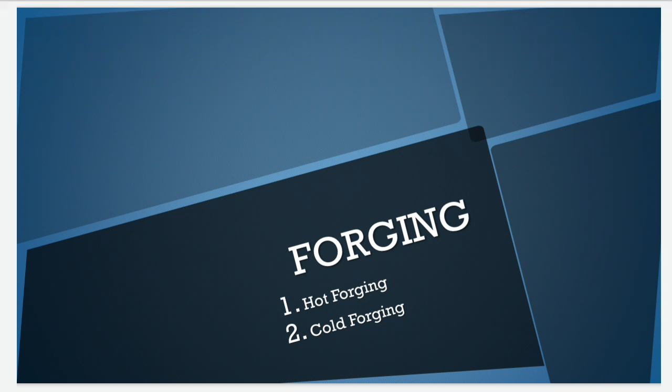This is continuation of module 4, forging. Forging is a compressive metal forming process involving shaping a metal piece by hammer or press. The figure shows an open die forging process. Note the red hot bar stock in place.

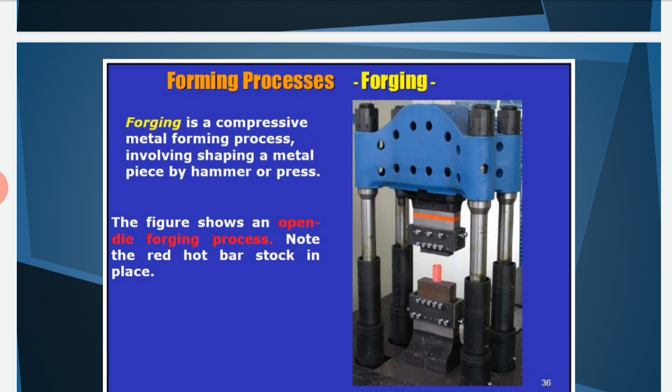Classification of forging operations: cold versus hot forging. Hot or warm forging, most common due to the significant deformation and the need to reduce strength and increase ductility of work metal. Cold forging, advantage: increased strength that results from strain hardening.

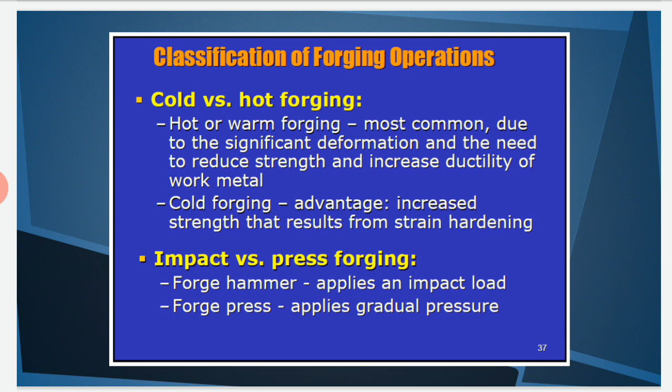Impact versus press forging. Forge hammer applies an impact load. Forge press applies gradual pressure. Types of forging dies: first one open die, second one impression die, third one flashless.

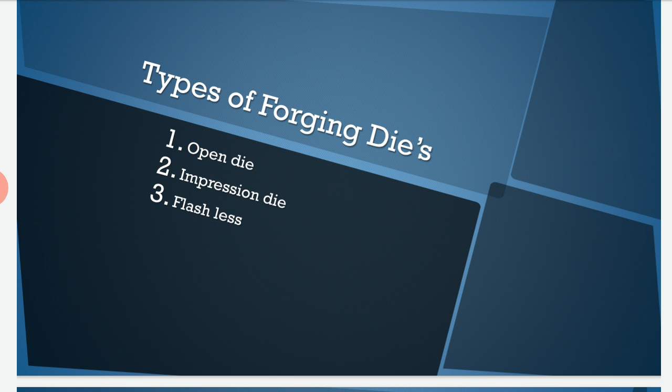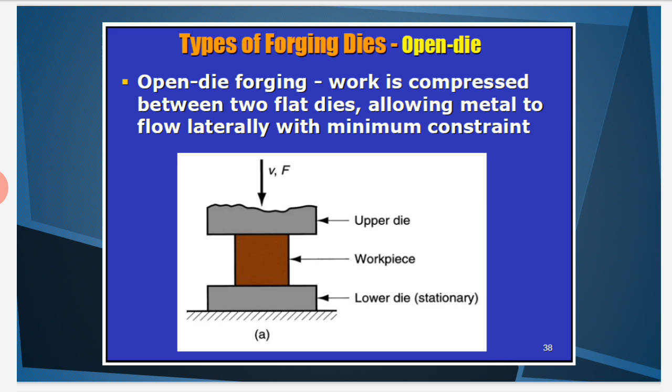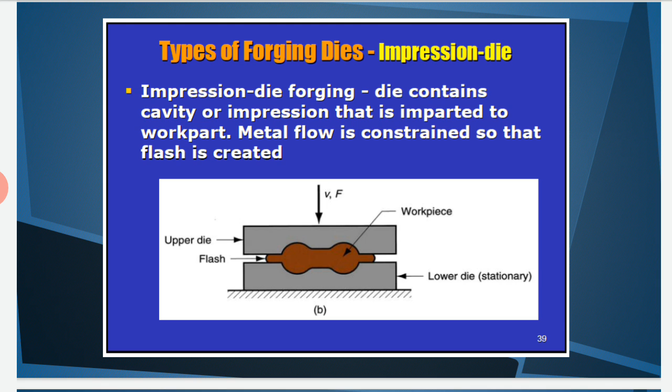Types of forging dies: open die forging, work is compressed between two flat dies, allowing metal to flow laterally with minimum constraint. Impression die forging, die contains cavity or impression that is imparted to work part. Metal flow is constrained so that flash is created.

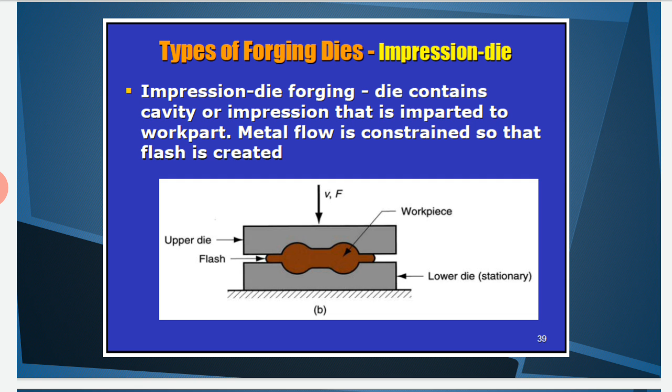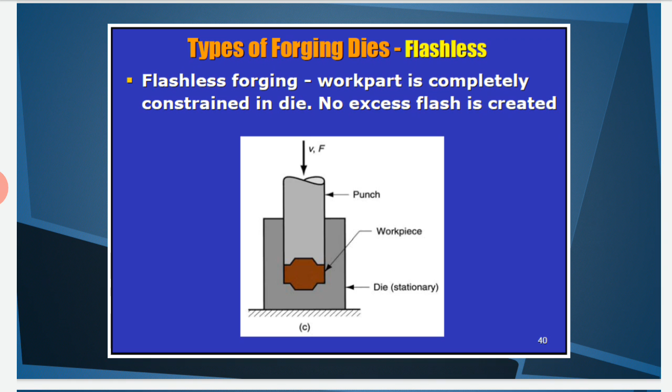Flashless forging, work part is completely constrained in die, no excess flash is created. Drop forging, it is also called stamping. It consists of a special type of hammer known as drop hammer or drop stamp. Perfectly made steel dies are used for forging.

The top part of the die is raised by mechanical links to a certain height. The heated metal is placed accurately in the bottom part of the die. The top part of the die is then allowed to fall suddenly. This gives a high blow and completes the workpiece in a single operation.